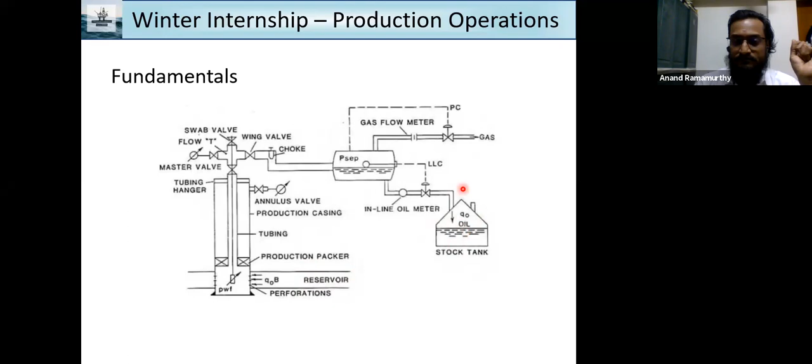If you use 2 barrels at reservoir conditions and produce 1 barrel here, it is only 0.5. But you have to make it more and more. A 0.7, 0.9 are better numbers compared to 0.5. So that all depends on the production operations. Even with a tight reservoir, a reservoir which is not having a good quality crude oil, with better optimization, you can improve your recovery factor and you can improve the quantity of oil you are getting at the stock tank conditions. That is what is the production operations.

So you have to understand the fundamentals about the pressure drop across each point, then about the completion design, and about the surface. So when we talk about the design, equipment design, we are not going to do any design about the line size or the separators or the flow parameters here. This is all done by process engineers, chemical engineers, not by petroleum engineers. If a petroleum engineer gets a job in this company and if he is trained to do it, then a petroleum engineer will be doing this job, design.

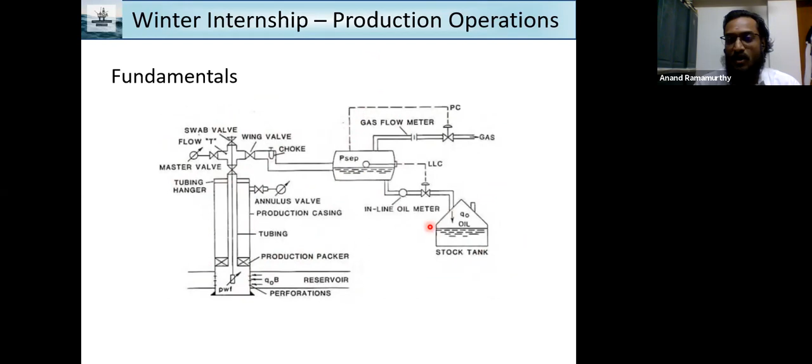But in ideal conditions, a petroleum engineer will be working on the reservoir, on the wells, completions, and the surface operations here, not on the design of the separators. So when we talk about equipment and design, we'll be concentrating more on the well completion. So if you have to design a completion string, the equipment which are required to produce the well, for further workover, for any problems, you need to know the reservoir conditions, you need to know the surface facilities, you should have good knowledge about the casings and tubing, what you're going to use, what perforation techniques you're going to use,

and then about the completion equipment or the tools, the flow control equipment. How are you going to control the flow here? When I say control, it's not to control the pressure. It is only to facilitate the operations. You are not going to reduce or control the flow or pressure. For controlling the oil flow rate, it is only at the choke at the surface. This flow control is sliding sleeves, gas lift mandrels, which are basically to circulate and enhance the production, not to control the flow.

Then the subsurface safety system, the subsurface safety valves, which will have a control line coming to the surface. In any emergency, when the pressure is lost, the safety valve will close. It will not allow any fluid to come above the safety valve. This is for the safety system. And the packer system is to restrict the hydrocarbon flow into the annular section. With this packer, the oil flow will happen only through the tubing. It will not come through the annulus.

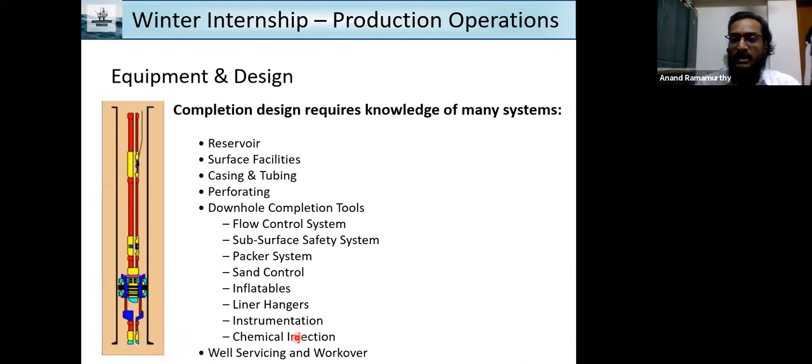So putting everything into production operations, this one chart will explain production operations. It's not a single operation. If you have to do a sand control design, not every completion engineer is well versed in sand control, or not everyone is good at coil tubing operations or inflatable operations. So the requirement for manpower is huge in this production and workover side, and getting more knowledge into each area is going to take minimum 2 to 5 years. So one person is not going to be able to be a master in all these areas.

A person with 30 years or 40 years experience, still he'll be master of a few areas only, not all areas. A drilling department is not going to get into the completion side. The completion department is not going to get into the production side. The operations team is not going to work in the engineering side, or the engineering people are not going to move to the field for doing the production operations, because each department has their own functions and limitations to work.

So if you want to become a master, it's going to take 40 years in a few areas, not in all areas. So if you hear anybody telling that I know everything, or I can design any equipment for the oil field, it's going to be a debatable situation.

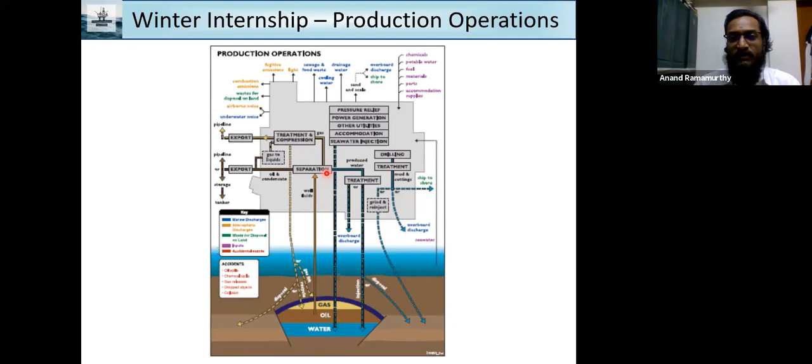So everywhere, petroleum engineers are required, and they have to have knowledge of this complete production operations. You need not be a master of it, but you have to know the operations, you have to know the fundamentals and basics. That's what we will cover in this 1 month workshop.

To simply put the line diagram, the oil or gas which is going to come to the surface, it is separated into oil, gas, and water. Water is treated, it is disposed of or re-injected. Oil, once it is separated, it is treated. That is stabilization. And it is stored and it is exported or transported. Gas, because gas is compressible, and gas transportation, you have to compress it because the volumes are very high at low pressures. So you compress it or you increase the pressure so that the transportation becomes easier.

The problem where you get stuck with gas transportation or gas operations is in dehydration. You have to do it because there is always moisture or carried away liquid in the gas, and this has to be dehydrated. That means it should not have moisture or any liquid. So once that is done, then it is ready for export or re-injection.

Any gas which is coming out of these operations should have a flare system. Any production facility will have a flare system. This is a safety system. Any gas which cannot be handled or which escapes this process goes into the flaring system and it is flared. The intention is to keep a flare burning all the time as minimum as possible. It's not that just because there is a flare system, you can open up the unwanted gas and flare it. The unwanted gas is sent back and treated, and it is sent back into the mainstream, not to the flare system. So everything you see here requires petroleum and chemical engineers.

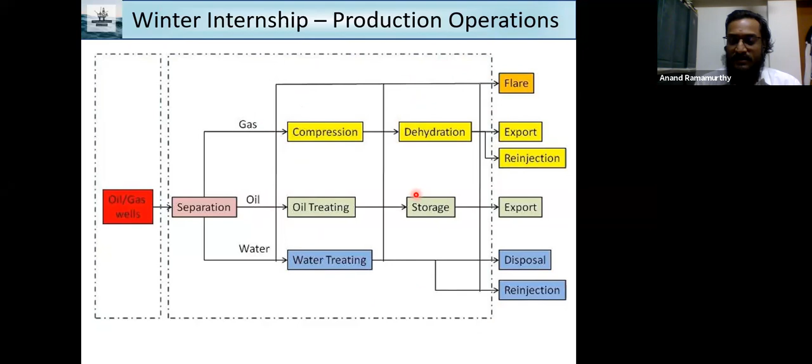And when it comes to more of transportation and area, it is of mechanical engineers. And all the design of this equipment is done by process engineers or chemical engineers. So next, when we talk about enhancement and optimization, what is it, or what is that you will be doing there? Just to have a quick understanding in it. Surface production. That is all the surface equipment. You have to have knowledge about it, right?

From the choke, then you will have the manifolds. And when you say manifold, there has to be different types of valves for diverting, controlling, shutting off the flow. There are different types of valves which are required: mechanical valves or control valves. So from the manifold, it goes to the separator, and each separator has its own design. It's not an empty vessel.

There are many components inside the separator, which is designed for that quality of crude oil, so that the separation process happens efficiently, because the retention time of this crude oil inside the separator is crucial. Only then it will allow the separation to happen. If it comes out very quickly, then the separation won't be proper. So for that, what are the equipment you're going to have inside it?

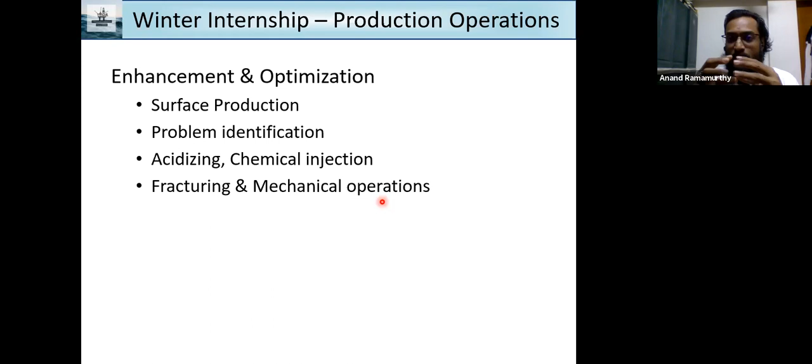Or in some cases, because of the drilling activities, the near wellbore formation gets damaged, formation damage. And because of this formation damage, the flow is restricted. They call it as the skin. If the skin factor is high, the flow is getting restricted. So you try to go in and do some fracturing to increase the flow path, to increase the permeability, or to reduce the skin factor so that the flow is improved or enhanced. And what are the mechanical operations you do in the completion and inside the wellbore to enhance the production?

Then the flow rate optimization. So when I say optimization, it is basically pressure maintenance. By maintaining the reservoir pressure or keeping the pressure drop minimum, the reservoir conditions are improved and the optimization becomes easier. If the drawdown is very high, the productivity is very less. Because if you see the productivity formula, the drawdown comes as a denominator. So the higher the drawdown value, lesser the productivity.

So these, we will look into it, and there are some formulas, and then there are some calculations to be done to calculate the productivity of the wells, where you can understand it better. And there might be some GATE questions in doing some calculations for all this. And these questions or the problems will be given as handouts at the end of the week so that you can work it out at your leisure time. And if you have any doubts, we can get it clear.

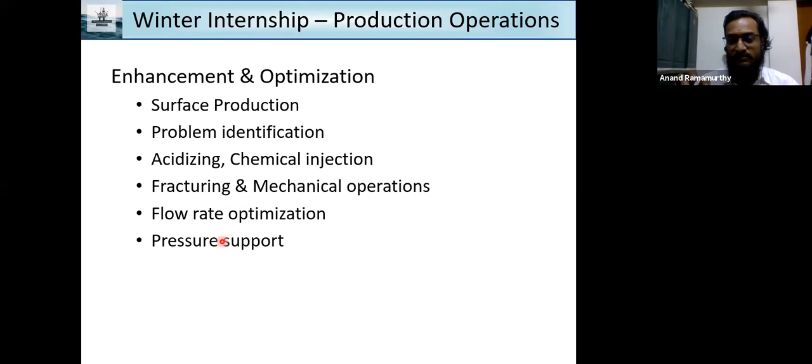Then the pressure support. When I say pressure support, the optimization is different from the pressure support. In optimization you have to maintain the drawdown, that is from the wellbore to the surface. But when I say pressure support, we are trying to give support to the reservoir. The reservoir pressure is going to reduce as we keep producing. So at one point of time, you have to give pressure support to the reservoir so that it does not fall freely, in the sense it's not going to drop drastically and get to the bubble point.

So the intention of the reservoir engineer is always to keep the reservoir pressure as high as possible. He will not allow you to open the choke. But as a production engineer, you want more production. So your intention will be to open the choke to produce more. So you come to an agreement with the reservoir engineer. What is the optimum production rate? If you have to increase it, you have to give pressure support at some point of time during the life of the field.

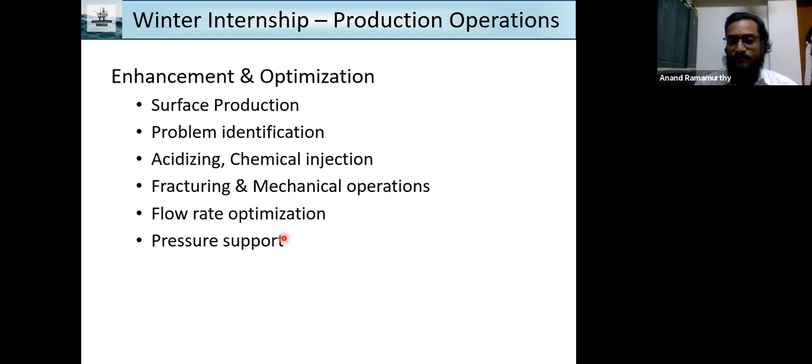So then we talk about storage and transportation, and this becomes more critical in offshore conditions, because offshore storage is more critical. Onshore, you can build storage tanks much easier than in offshore conditions. It has to be shuttle tankers or pipelines. There are some vessels like FPSO which are self-contained storage. It can do production operations, it can do the processing, and also store the crude oil.

With FSO storage, there has to be a processing facility and a storage facility. If both are combined, it becomes FPSO. If you have to have an FSO, floating storage and offloading vessel, then you have to have the mooring system, support vessels, crude transfer lines transferring the crude oil from the production facility to the FSO, and from the FSO to the shuttle tanker. And you have to have offloading support. Every time the shuttle tanker comes in, you transfer the oil from the FSO to the shuttle tanker.

If it is pipelines in onshore conditions, it's much easier. Onshore pipelines are much easier to install compared to offshore lines. If it is offshore, whether rigid pipelines or flexible flow lines, whether shallow waters or deep waters, depending on that, this is decided. And you need to have an onshore terminal where you can receive the oil, whether it is coming through tankers or pipelines, to collect it, store it, and then transport it to the refinery. So there's a lot of physical work required here, with more equipment, where the job opportunities are more.